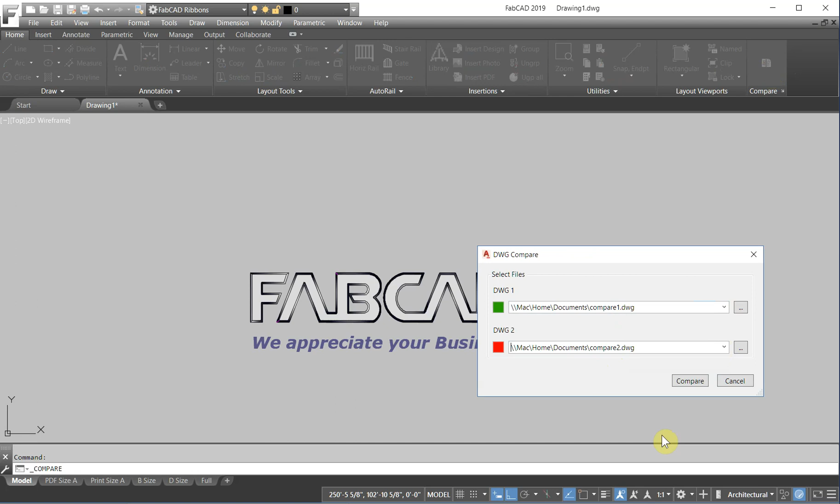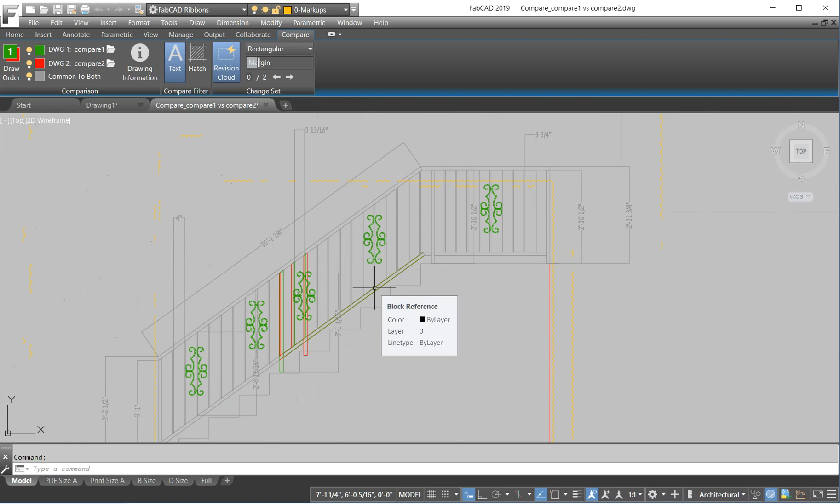First, we have a new command called Drawing Compare, right here on the ribbon panel. So if you do any collaborative work, you'll really like this one. I click on the command, bring in an existing drawing, and then a second drawing, and click Compare. The program opens up a separate drawing and a ribbon with a lot of tools in it. The green is drawing 1, the red is drawing 2, and the gray is common to both. So you're basically overlaying one drawing on top of another, and you can see what changes were made in whichever drawing you want to deal with. That's what Drawing Compare is all about.

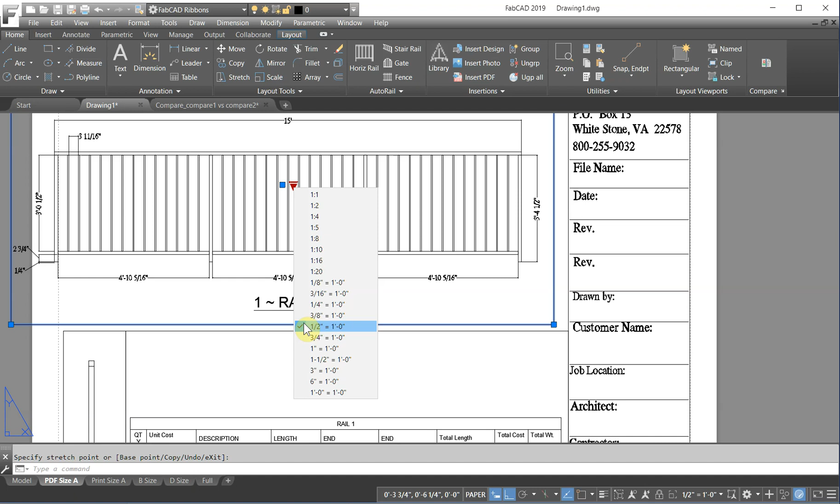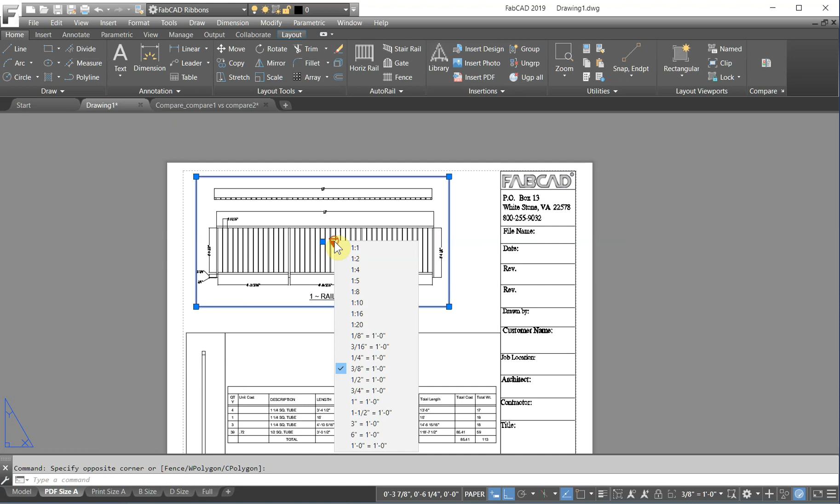The second feature has to do with scaling viewports. Let me go to a viewport here. If I click on this viewport, you notice there are two new grips. The square one is for moving, and this is a pull-down which gives you scales. So you want to set it for 1/4 inch equals a foot. Notice when I do that, not only does it zoom the image down to 1/4 equals a foot, but the viewport changes scale also. I like this because you can see exactly what effect it's going to have on the sheet itself. When I go up to 1/2 inch equals a foot, I can tell it's not going to work on this particular sheet, so I'll set it back down to 3/8.

But as the infomercial says, wait, there's more. You probably already noticed the ribbon icons are easier to see. They've been flattened to a 2D wireframe configuration, which makes the images much cleaner. At the bottom of the screen, you'll also notice how clear the status icons look and how easy it is to tell when they're active or not. When you light up, the whole box lights up—a lot easier to see.

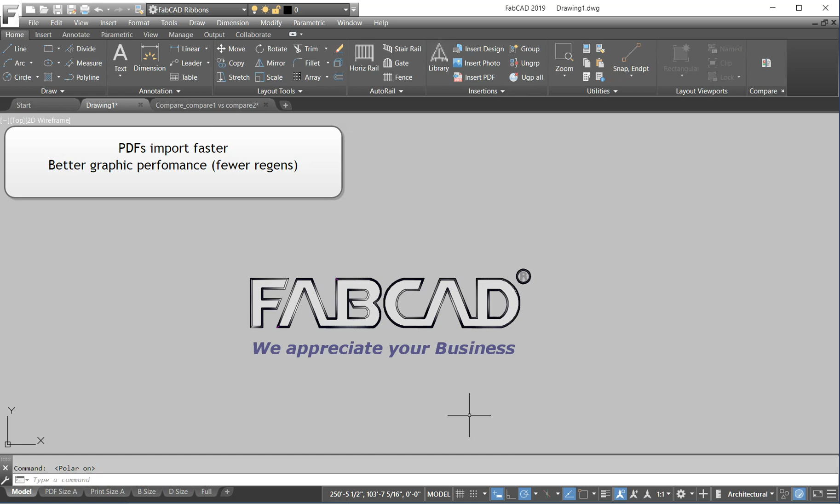Some back office improvements include faster importing of PDFs and better graphic performance, which will reduce the number of regens required, as well as reduce memory conflicts that can cause crashes. There are also back office improvements in the AutoRail program, some minor bug fixes, and better performance.

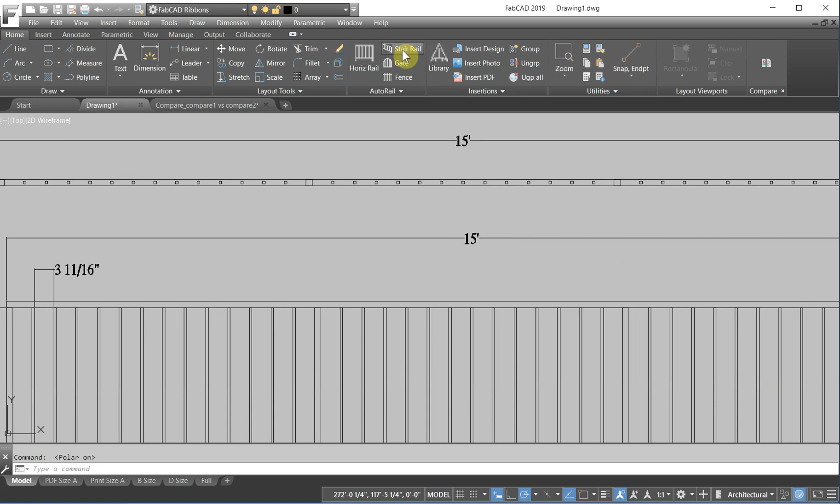Pickets are now shown in plan view in horizontal rails, stair rails, and fences. Here's a little sample of it—we've added the pickets in there. There's a change in the stair rail program too. We'll add a landing. You notice there's a little square by this post that turns that post off and on. Having this kind of post control is great for situations where no post is desired, where the rail breaks.

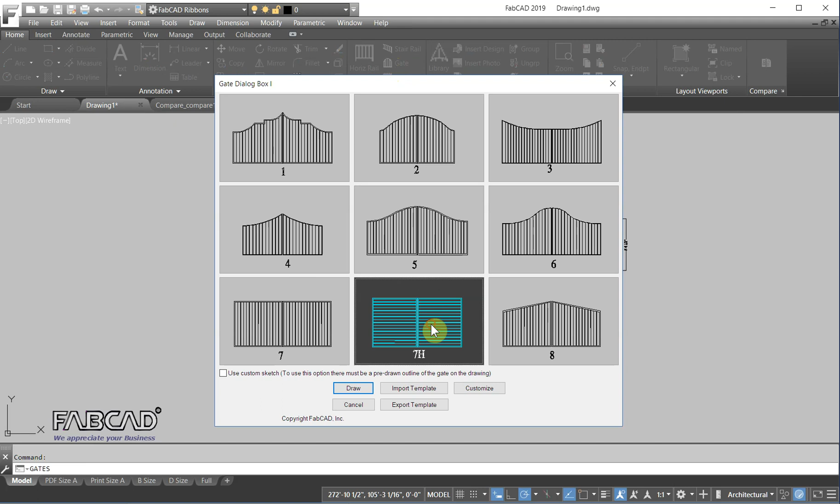For those of you who have older versions, we now have horizontal member options for gates and fences. This is especially useful for those who fabricate louvers and shutters. So I go in here, click on here, pick that, click draw. You can adjust the height of the side verticals. Click next, draw. There's the louver. It also generates a side view showing the louvers, and that's how they look from the front view.

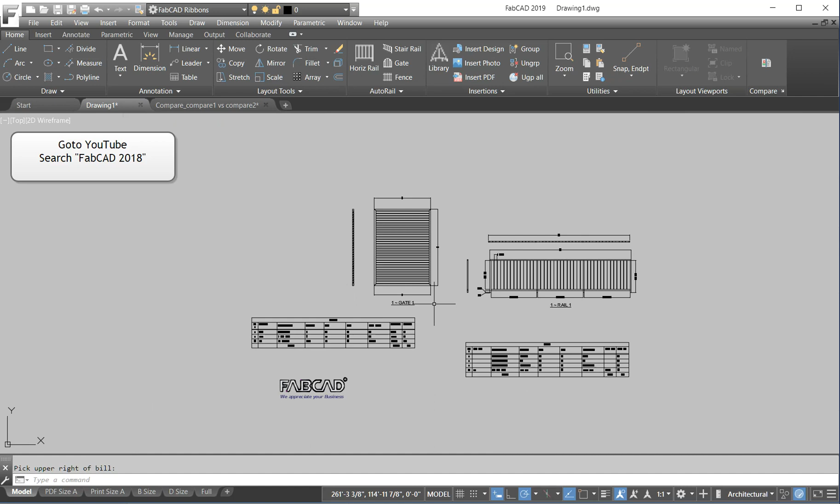For more information about new features from earlier versions, just go to YouTube and search for FabCAD 2018 or earlier.